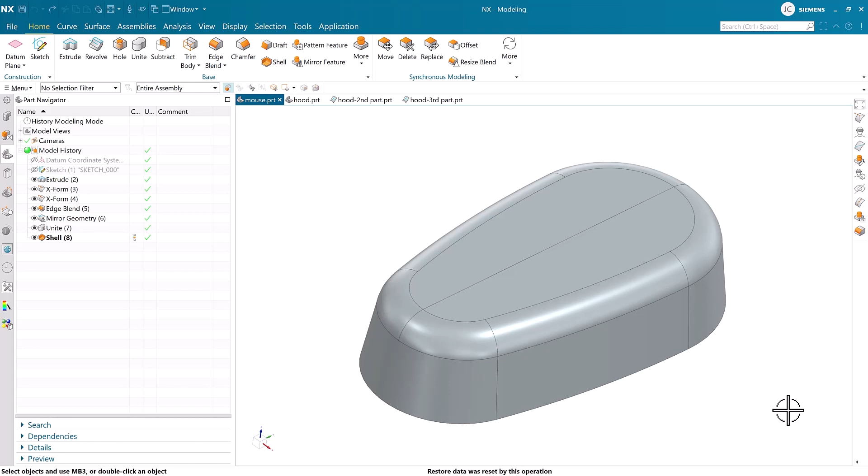For this part, we already have existing Xform commands that we can edit, so we can look into the Part Navigator to make our changes. When the command window opens, we can begin to set our parameters.

Changing the degree will change the number of poles that are available for editing. Once that's set, we can begin to move our poles and polylines to create our desired surface.

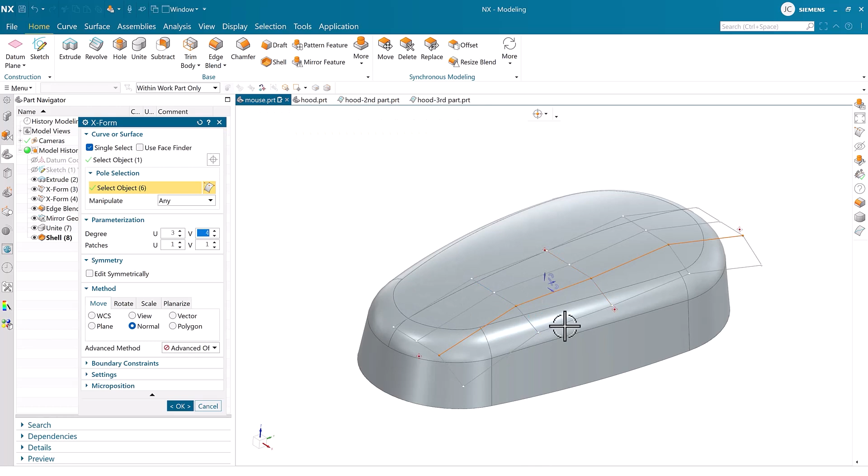Selecting the poles will move a specific area of the surface, while the polylines will take all of the poles within a row. One trick if you want to select multiple poles at once is to turn off the Single Select toggle. This makes it easy to make synchronous changes when multiple poles or polylines must be moved at once.

Now that we know the basics of Xform, we can take this to a more realistic application, where we are trying to reverse engineer the surface of a car's hood.

This time, we'll want to start a new Xform. We can do this by navigating to the Surface tab, and the tool can be found within the Edit group. Again, we can start by opening Xform, where we are prompted to select the object we want to surface.

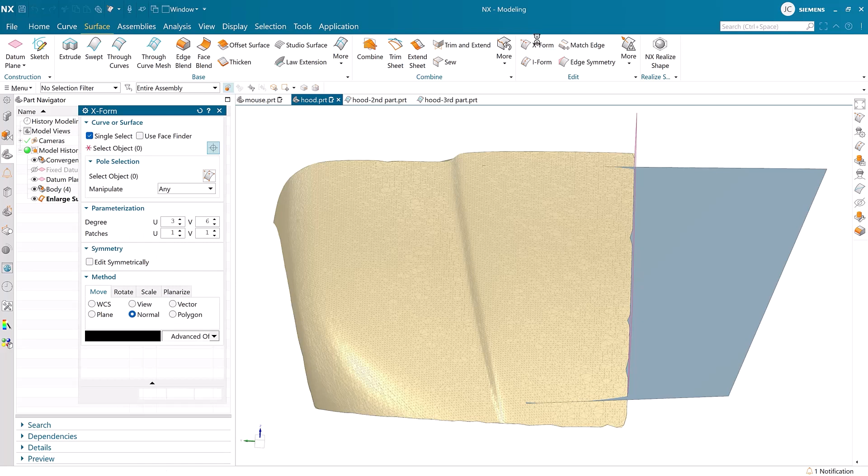Before we begin to truly surface our part, this time we're going to utilize the deviation gauge tool to assess the distance from our new surface to the hood. I've already preset the values we'll need, so we can jump right into shaping our surface.

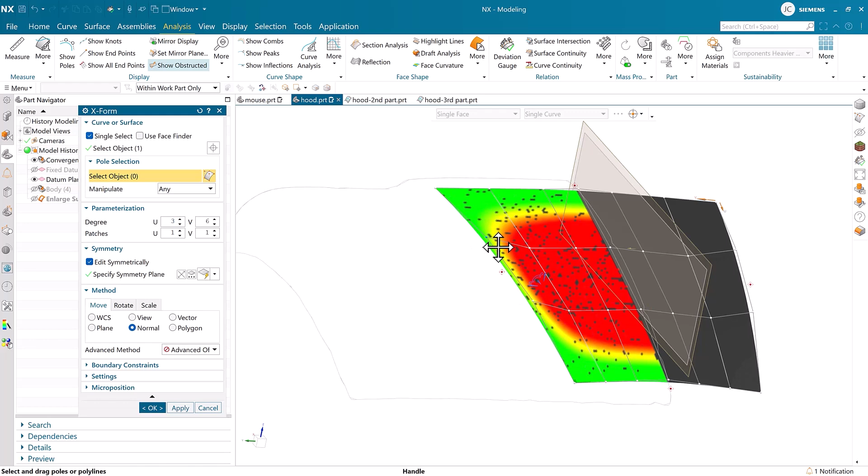As we begin to shape our surface, we can rely on the color map to gauge how similar our new surface is to the hood contour. Once we finish, our deviation gauge should display that our new body is inside of the tolerances we previously defined. This is a great way to ensure our new body is reflective of the existing hood surface we had to start with.

The last thing I want to look at before we wrap up is what we can do if our poles and polylines get out of sync.

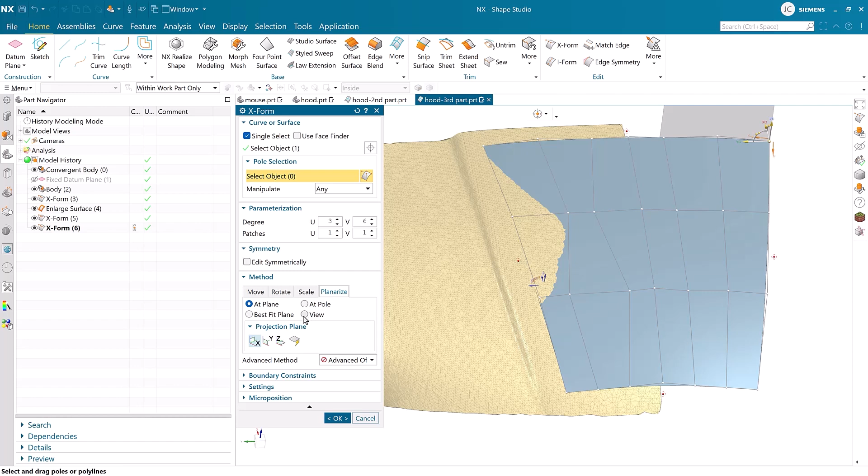If we navigate to the Planarize tab, there are a series of options to realign the poles in our Xform. One good way to fix this is using the Planarize View tool. This will realign the poles within the polyline according to our current view of the surface.

In conclusion, in this video, we looked at the basics of using Xform, and then dove into what a more complex application may look like. To start, we took the primitive mouse and explored how we could use our poles and polylines to properly shape a surface. Next, we looked at the importance of the deviation gauge tool and the reverse engineering of a car's hood. And finally, we discussed the Planarize View option when we would like our poles to be realigned.